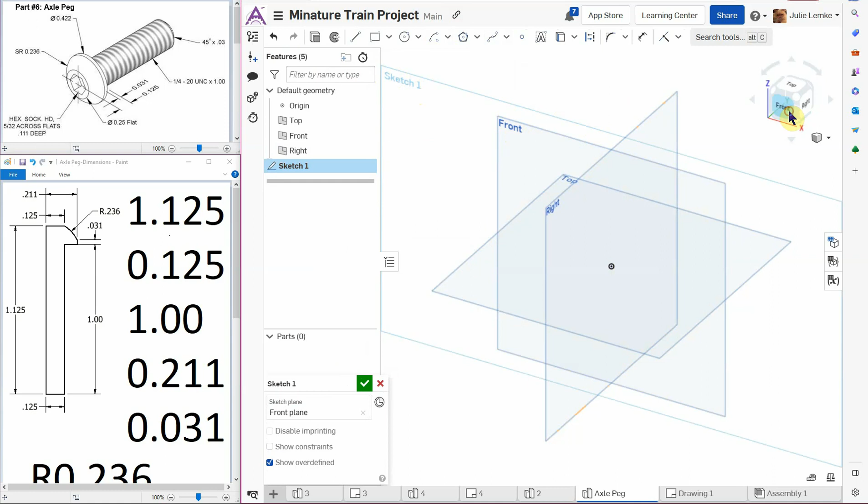We're going to go to Sketch, click on Front. This is normally over here, but because I have everything a little smushed, I'm moving it here just to get it out of my way so you can see what's going on. We're on Sketch 1, on the front plane, and we're going to click on Front for our cube in the corner to make sure it's lined up nicely.

What I'm going to do now is use the line tool to place in quite a few lines just to get us going. Right now I'm not too concerned with the size of them, I just want to make sure nothing is linked together, so everything is free moving.

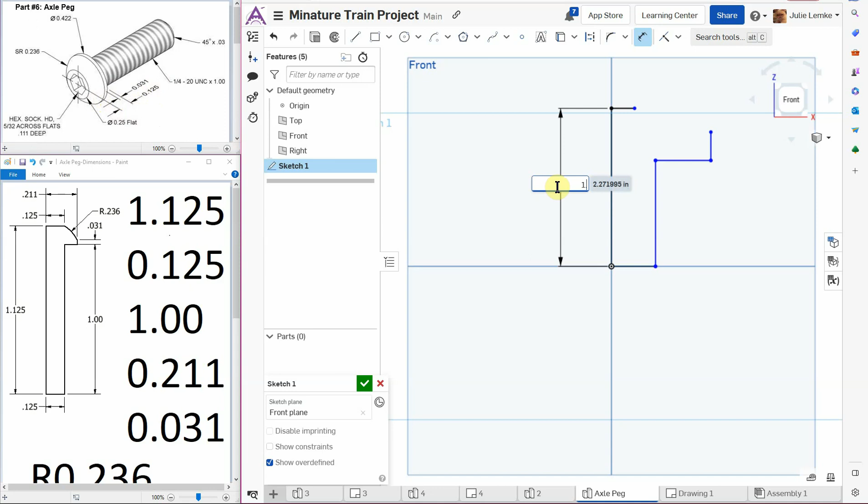Now I'm going to use my dimension tool and start adding in the dimensions. The total height of our part is our 1 inch for this section, plus our 0.125 for the head part of the axle peg, so together we have 1.125 inches.

Our bottom piece right here is going to be half of our 1/4 inch diameter for the thread portion. So half of that, if you type it in as 1/4 inch, 0.25 divided by 2, gives you the same information that I have over here.

Instead of drawing this whole thing with a cylinder and then adding on this cap piece, what we're going to be doing is drawing this outline and then revolving it around, and then adding in our final details. Now I'm going to click on here.

So this is the thread portion. This is going to be 1 inch.

Now we're going to add in this portion right here, which is, you can see it, yep, there it is. So this one, we could either do 0.422 divided by 2, or you can just do that in your head and you get 0.211.

This little section right here, this little piece, our value for that is 0.031.

Our next piece is this top piece, that's our last flat line. That is this section right here, so it's a 1/4 inch, and half of a 1/4 inch is 0.125.

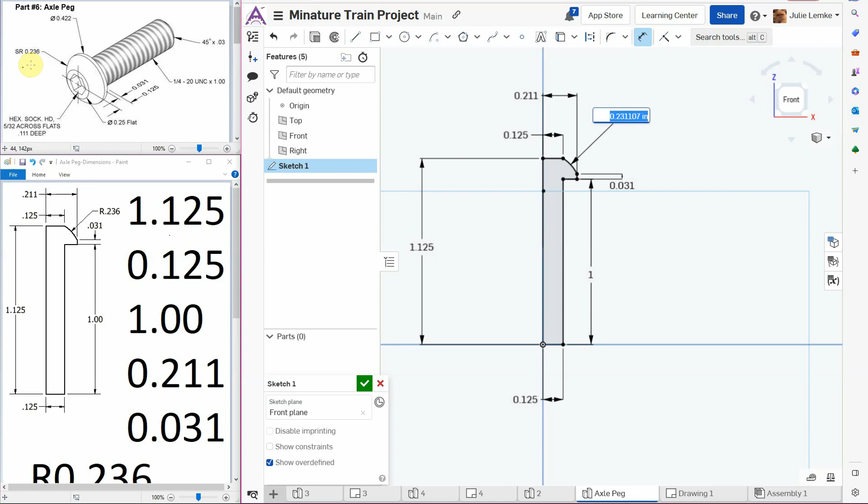But what we still need to do is add in one final dimension. This one is this spherical radius, so right here. Our spherical radius is, let's see, 0.236. That gives us all the dimensions for this first portion.

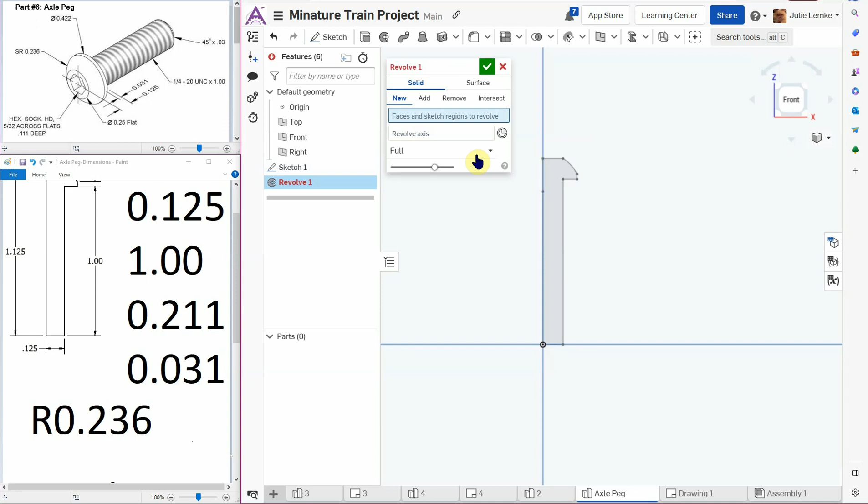Now we can revolve our part around. I'm going to move this up to where it normally is. So this is our face, and we want to revolve around, oop, I deselected that. There we go, we want to revolve around our edge, which is that center line.

Right now we have just our basic shape. It doesn't really have all the features that it needs yet. So now we need to add in our thread, so to do that we have external thread.

We can click on this bottom edge. You can see that it kind of turned a yellowy green color, that's showing where the thread is going to be placed. So we want ANSI, so ANSI size 1/4 inch, you can see that right there, 1/4 inch. Threads per inch, so we have 20 - yep, that's what we want, 20.

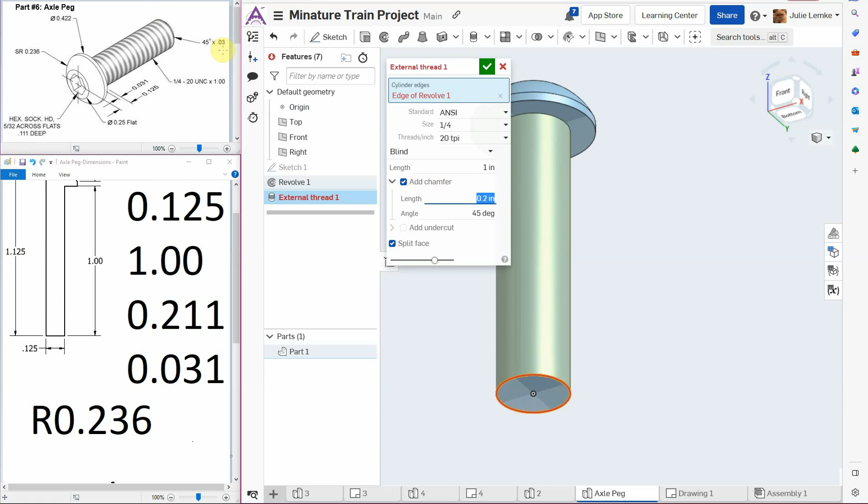For length, we want 1 inch, and we can add a chamfer at the end, which is nice. We can actually do these two in one. So the chamfer angle is 45 degrees, and our length—you can see right now it's this orangey red color, letting us know something's wrong. The length right now is too big. The one on our assignment here is 0.03.

You can see that now it's going in properly, so we can click our green check mark. Right now it doesn't look like anything happened, but it actually did. When we do our working drawing, you'll see the proper notation show up—it just doesn't have a visual representation. Some CAD programs will wrap it with a graphic to show you the thread is there, like in my example here; it's not actually cut in properly in the program, just a graphic representation of what it would be.

If you forgot to do the chamfer and needed to do it after the fact, you just use this chamfer tool here. You'd click on that bottom edge, and you could either use equal distance, so both sides are the same, or do two distances, or distance and angle. On our sheet it has an angle and a distance, but if it's 45, the two distances are identical. I'm going to exit out of that.

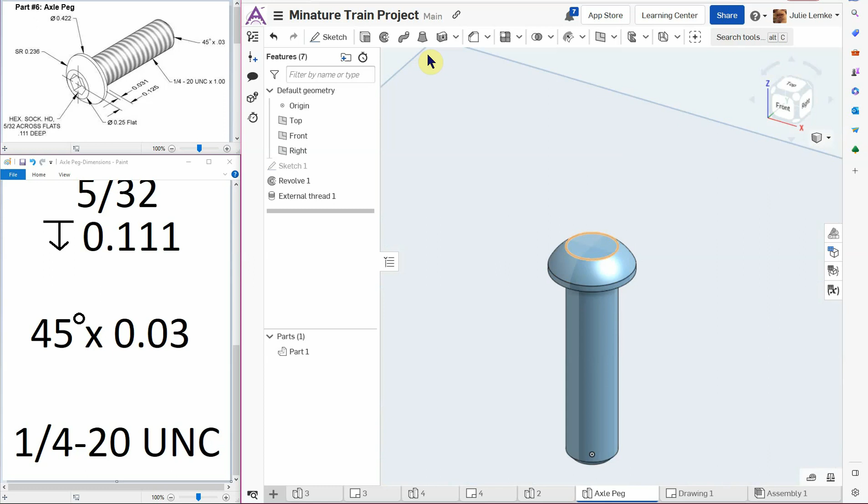Our one last piece we need to do is put a sketch on our top surface here. The reason is we have a hex socket that we need to put our information in for. So we need to use—there it is—an inscribed polygon, because we're going across the flats for this.

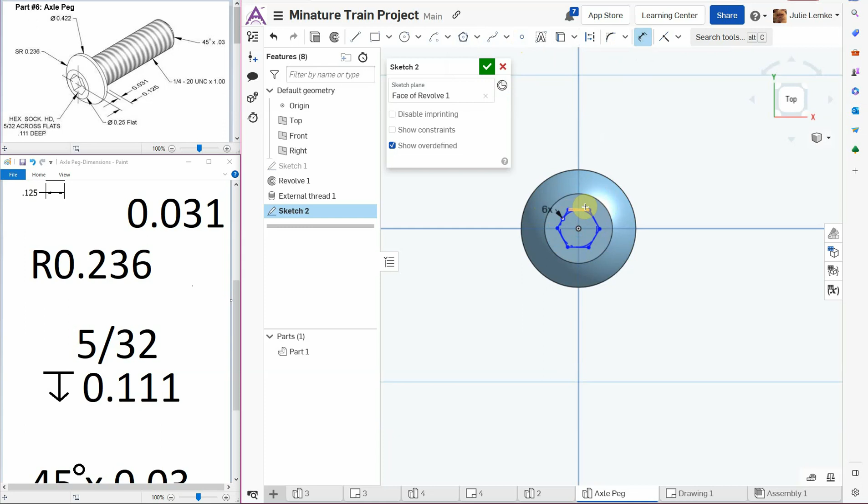So we want to click on the center, move this off to the side, and make sure it's 6. I know it's a little hard to see my number because it's in the border. All right, so I placed it in. I want my distance across the flats, so flat line, click here. So there we go—across the flats it is 5/32... so 5 divided by 32.

Right now you can see this inscribed circle is black, so that means it's locked in place at the proper size. But if I hit escape, I can back out of my tool and we can see that we can kind of move this around.

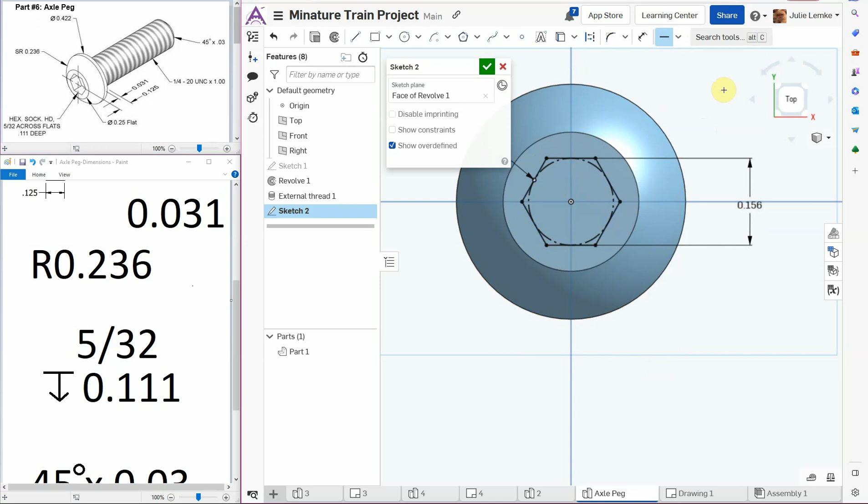What I want to do is use the horizontal constraint. Click on the top portion or the bottom portion, and it'll line it up nicely, so then when we go to our working drawing, it won't be crooked—it'll be nice and lined up. So now we can click our green check mark.

And we want to now extrude this portion. We want to click remove because we're removing material, not adding. If for some reason it's showing up red, in the wrong direction, you just click on this and it'll flip. So the depth for this—we have our depth symbol right here—we can see it's going to be 0.111, so that's three ones.

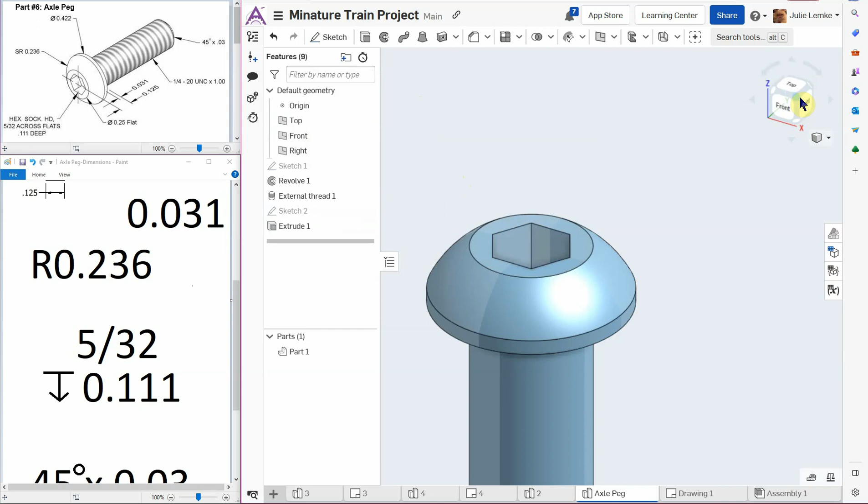And that is our part. So we have our revolve, we have our external thread with chamfer—if you had to do the chamfer separately, you'll see it next—and then we have the extrusion for our hex socket. Once you are done with this, you can move on to your drawing for your axle peg. Good luck.